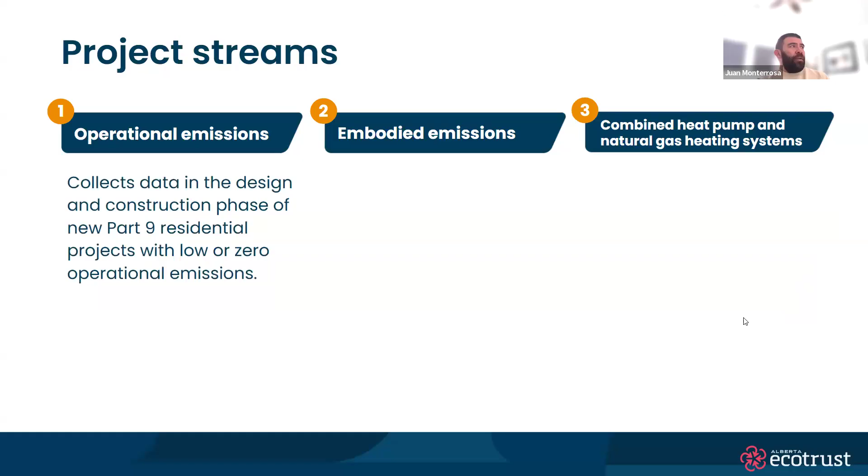This project was essentially, we took some inspiration from our friends in ZEBx in the Lower Mainland with their near zero research project, with their different streams as well. So we've been fortunate enough to learn from them and help build the program based off of their work. So there's three different streams that we are looking at. There is stream one, which is for operational emissions, where we're collecting data for new construction in Part 9 buildings, anything going with low to zero operational emissions.

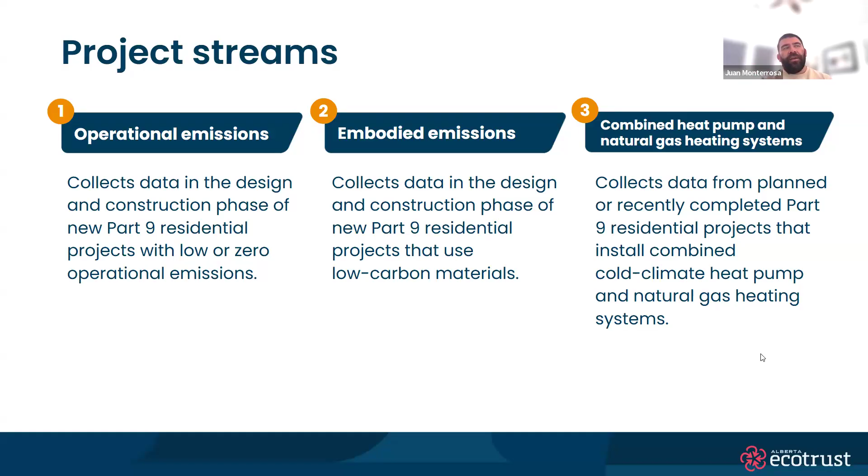The second stream, which is going to align a little bit with the work we're going to be hearing about today, is embodied emissions. So collecting data, same thing in terms of the design and construction for Part 9 residential projects for low carbon materials. And the third stream is looking at combined heat pump and natural gas heating systems. And again, getting data, and the biggest part through all these is finding costing data for each of those, but also trying to understand really the lessons learned throughout the process.

So this is a bit about where we're trying to get to and look at the current practices, trying to find the spectrum, I guess, of buildings. If you're just meeting tier one, tier two right now, what does it take to get to that tier four and up? If you've already been doing tier four and up for a while, what does that look like as well? And I think those different stories are very important.

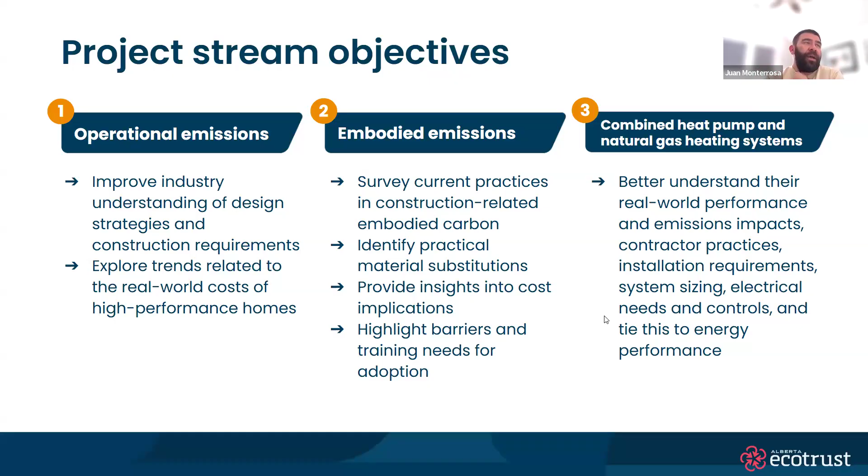The other portion of it, for embodied carbon and emissions, there's been a lot of great work done by Builders for Climate Action, and the reporting that's done through NRCan, that we could see what's happening across the country. And from our end, we want to see a snapshot right now in Alberta as well. And combined heat and natural gas, looking at again that Alberta lens that we talk about through our NBIX work.

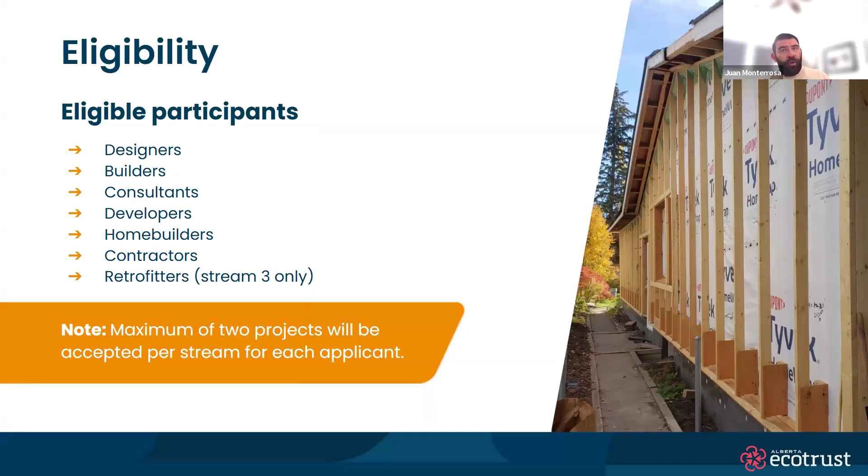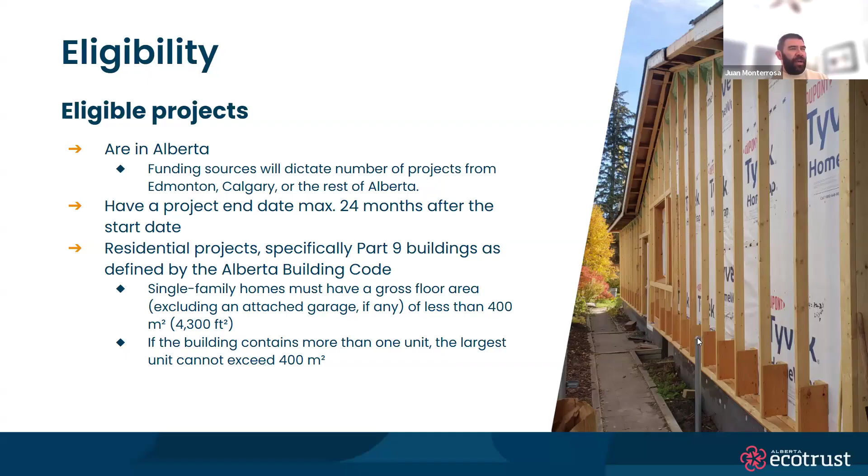But the primary things for eligibility is we're looking for designers, builders, consultants, developers. So it's not for homeowners. This is really looking at industry to help us provide some of that information. So the eligible projects. Projects, all the projects have to be in Alberta. The project end date is a maximum of 24 months after the start date, and they are Part 9 buildings, so single family, but also some multifamily that fall into that as well. We're not looking at commercial projects for either of the streams.

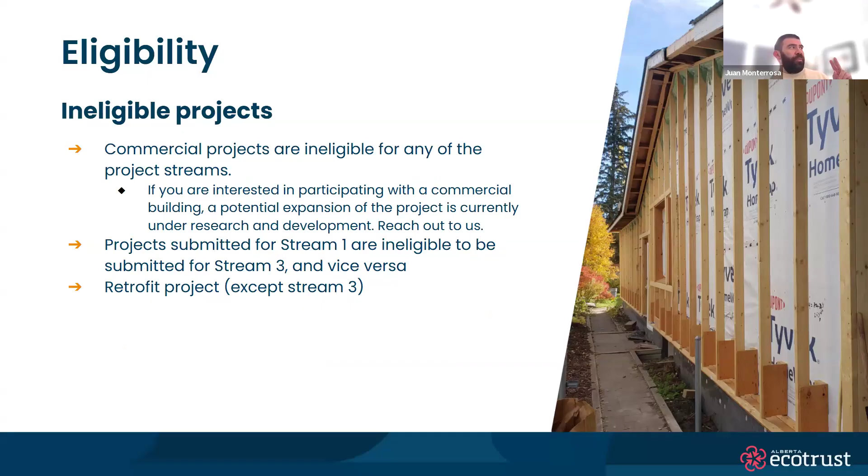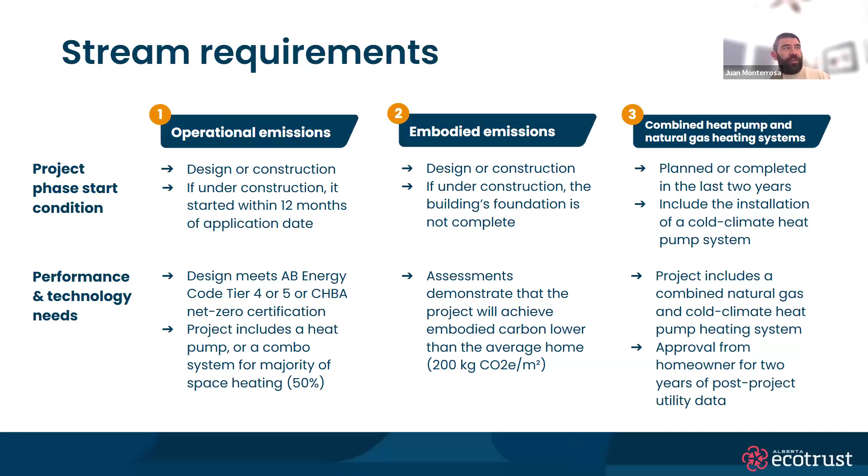If you're in stream 1, you're ineligible for stream 3, but there is an opportunity to look at stream 1 and stream 2 together. So the requirements, I'll put these up here. It is essentially questionnaires for design and construction, getting the information both on the embodied carbon calculations, the operational carbon calculations, and also on stream 3, the sizing of the heat pumps, but also the pre and post energy modeling for that as well.

The payments for all of the data, so for each one of the streams, this is how we're trying to entice applicants to come in and give us the very detailed drawings, energy models, and costing. So up to 25,000 available for stream 1. So again, there's 15 there for if you're at tier 4. If you're at tier 5 through the code, 20,000 and additional $5,000 if you're going with a ground source heat pump. With embodied emissions and the embodied carbon is up to $10,000.

So all projects will get 6,000 from the onset. And a portion of that is ensuring that those teams that have applied for this have also taken either the BEAM or the MC squared training, and then additional $4,000 if they're able to be 20% less than the 200 kilograms of CO2 equivalent per meter squared. And then there's the up to $8,000 for the stream 3.

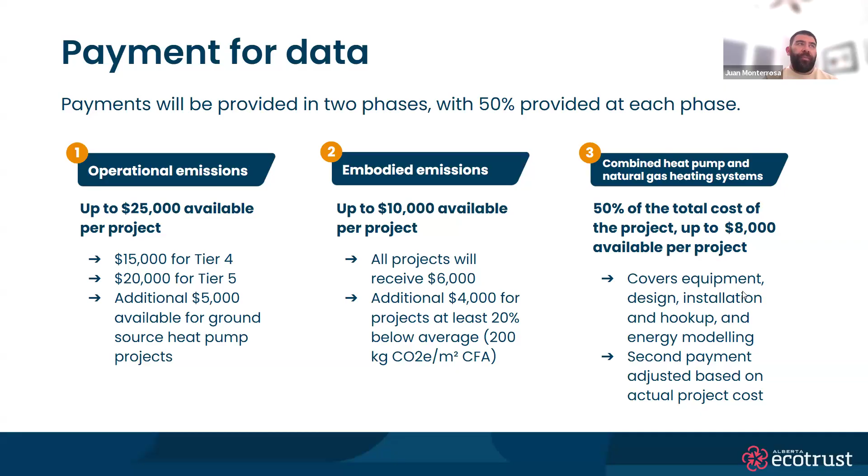So I think I've gone a little bit further, more detail than I had planned for here already. So I'll let Frank take over.

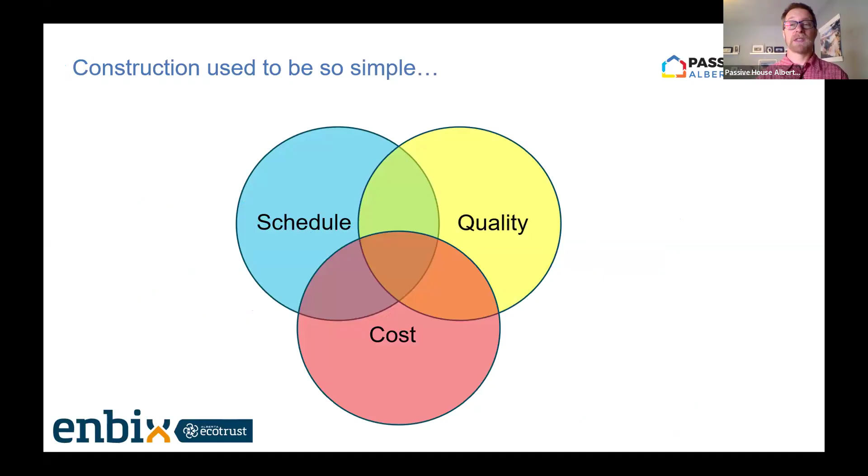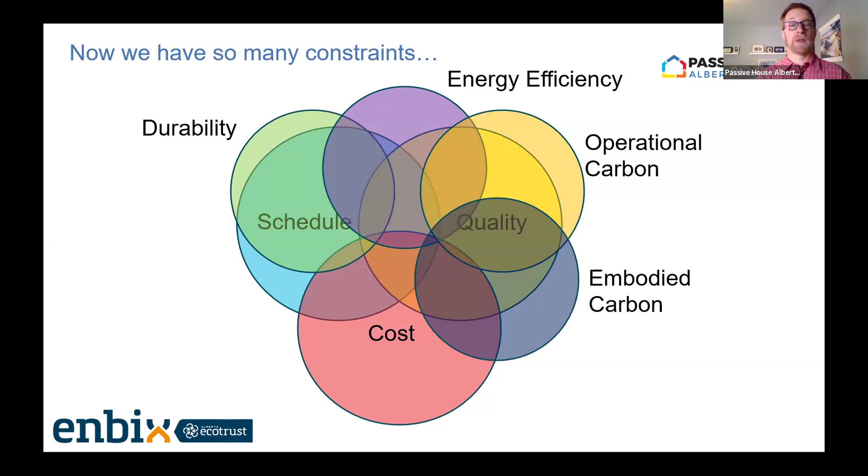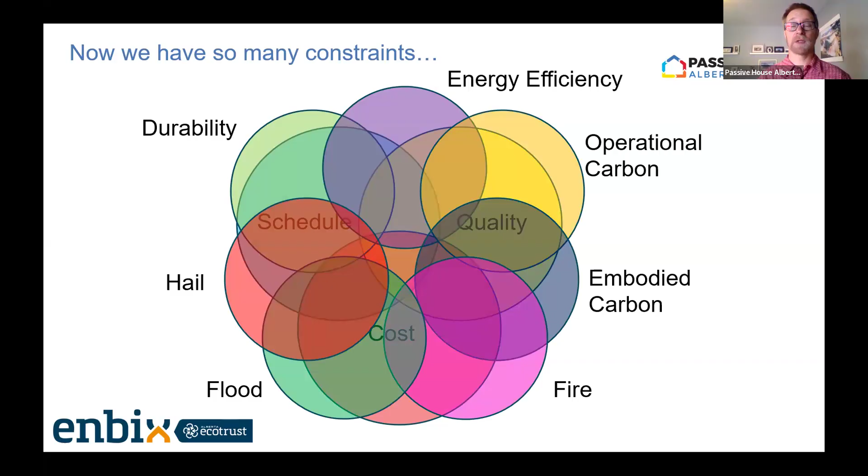But now we have to look at more things. So we are starting to look at how do we include durability, which is kind of those higher tier energy codes, how we improve energy efficiency, which is also those codes help us with operational carbon, embodied carbon, and then fire, flood, and hail. So those are some of those environmental risks that are definitely becoming more prevalent. Even if you're not sure if they're coming, your insurance companies know they're coming, and they are starting to change your costs of insurance depending how you react to some of those constraints. So lots more constraints we have to deal with.

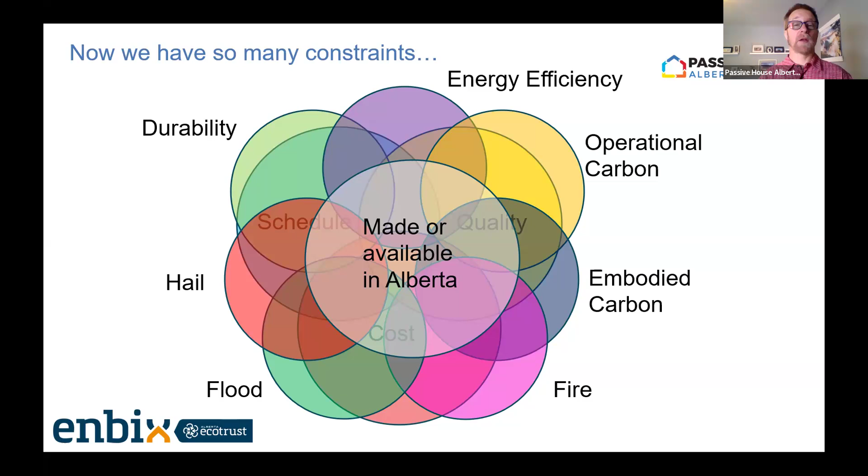And then finally, we want to make sure that all this stuff is available in Alberta, because if it isn't, then it's really not that helpful to us. And then kind of the overall goals, we're applying all of these good design processes and overlapping constraints, and we want to actually end up with a building that is comfortable. So what did the grant do? The grant was to look at some low embodied carbon materials. So what did we use?

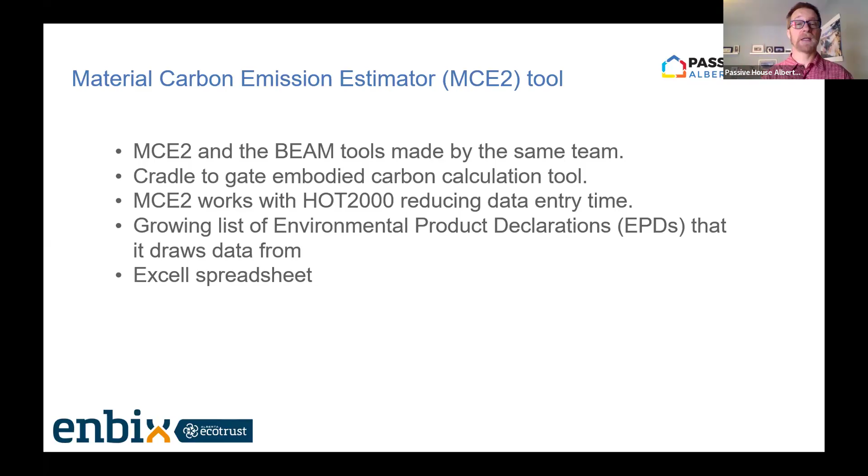There is that BEAM tool that Juan mentioned. We actually ended up using the MCE2 tool, which is the tool that works right off of HOT2000. So if you have a HOT2000 energy model, basically all the data gets directly imported to that MCE2 tool and just makes the data entry simpler. Both of them are cradle to gate embodied carbon calculation tools, and they all build off of that growing list of environmental product declarations. And really, both of them are just a big Excel spreadsheet. So they're really not that difficult to use. A few hours of training, a few hours of playing around with it, you will be able to pick it up and get some usable, informative results out of it.

So for those fire, flood, and hail, we use the Institute for Catastrophic Loss Reduction, nice big long acronym. They have a new resiliency tool, and that resiliency tool is designed to assist designers in selecting some assemblies and help them make better choices versus poorer choices. So they came up with a good, better, best rating for various options within various different potential risks. And the risks that they looked at were extreme heat, smoke and fire, floods, hail, and high winds, water shortages and droughts, and slope stability. So depending on where and what your project is, you might have all of them or a few of these risks that might occur.

And then you can go and look at that good, better, best rating system to see what products, materials, processes they recommend that you use.

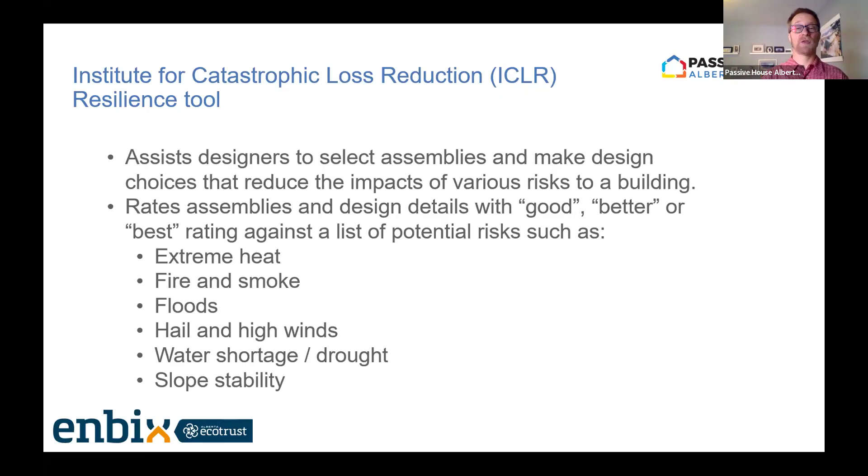Okay. So once we start talking about these low embodied carbon materials, let's start with the big elephant in the room, and also the easiest one to change, which is low carbon concrete. So concrete produces about 8% of the global carbon dioxide emissions in the world. So it's a pretty big chunk of the pie.

And because of that, over the past few years, concrete producers have responded with a number of what they call low carbon mixes. And really what they're doing is using supplementary cementitious materials to replace the cement, because it's actually the cement in the concrete that has the highest carbon emissions equivalents.

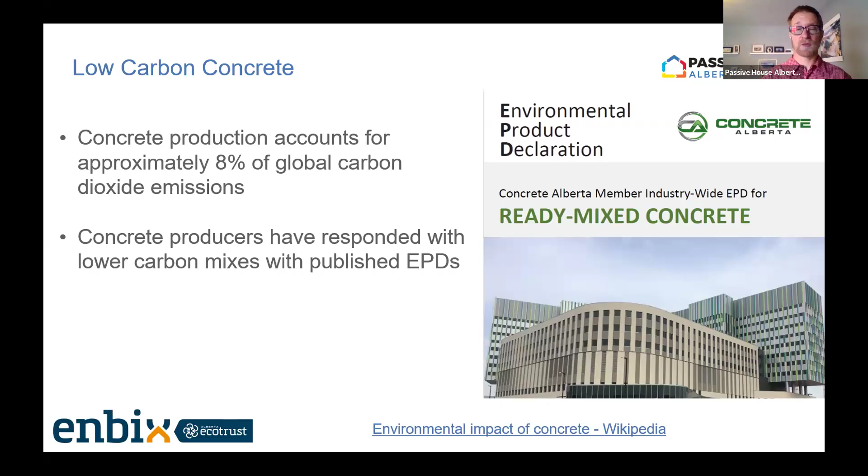There are breakdowns by province. So this is just a screenshot of the Alberta Ready Mix Concrete Association. So you should be able to call up your local ready mix supplier. This is the one from Lafarge. So Inland, Heidelberg should have the same one. Burnco, some of the smaller ones, should also still have availabilities.

And here you can see that just by looking at two different EPDs that have the same strength, so all the same performance criteria, they have a 10% carbon reduction. And because concrete is a fairly cost competitive industry, these lower carbon concrete mixes don't cost much more. They're probably very equivalent cost.

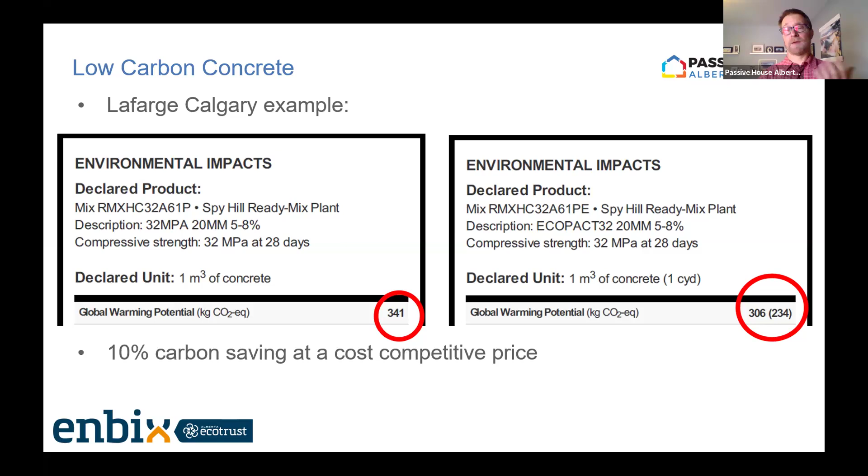In Alberta, the easiest one is just to swap out your cement for high fly ash. We've been doing this in Alberta for a number of years because we have good fly ash availability. So if you do nothing else from this presentation, please, next time you buy concrete, ask for the low carbon mix. That will get you the first step in reducing your carbon on a building.

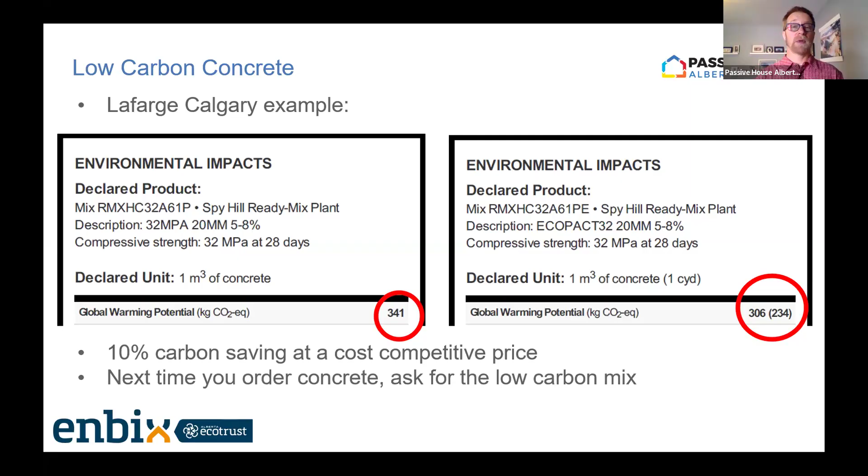So now let's look at some other options. So what we did is we basically took a whole bunch of common assemblies and broke them down by where the assembly is, and we gave them the nominal R value. We gave them an embodied carbon number, and then we roughly rated them with cost, fire resistance, durability, flood resistance, hail resistance, and those three colors just represent the good, better, best, or lowest, medium, high costs.

So starting at the very bottom with the slabs, there aren't a lot of options for our slabs. The current standard is just a 4-inch concrete slab, no insulation, which isn't a very good idea from a thermodynamics point of view. So ideally we add at least 4 inches, possibly 8 inches of EPS, so you can see the R values go up. And then we also included SI Construction.

They have a Polycore R slab, and it is a concrete-free slab. It still gives you some of the structure, but most of the structure is on the walls. It gives you enough structure on the floor, but it doesn't use any concrete. So as you can see, the embodied carbon number of the SI Construction Polycore R floor is actually less than just the 4-inch concrete.

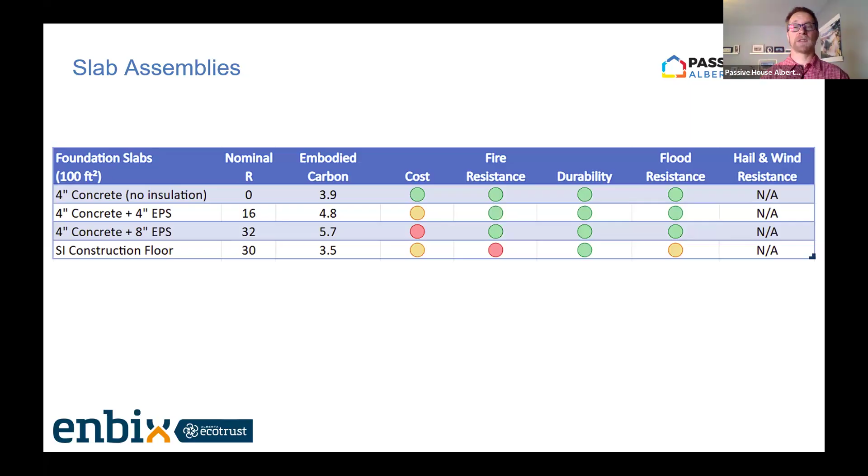Fire resistance, obviously 4 inches of concrete gives you better fire resistance than the Polycore floor. Durability, they're all fairly good. They're all fairly good for flood resistance, and hail and wind resistance really isn't an issue with slabs.

So let's move up a little bit more. Let's talk about some foundation assemblies. And now there is a much larger list, and this isn't a full list. This is just a list we have done so far. So if you're interested, if you're a supplier or you have your own assembly that you like, by all means, reach out to us at Passive House Alberta, and we will add your assemblies to these lists, and they will eventually get posted onto ENBIX or other websites.

So with these foundation assemblies, there's a lot more options. Again, we can start with just your basic concrete foundation wall with interior insulation, either 2x4 or 2x6. Then we can go to an insulated concrete form with various thicknesses of concrete cores. Then SI Construction also has their no concrete foundation wall, which is called the Polycore wall, in various thicknesses.

SI Construction is a local Alberta company in the Edmonton area. And then there's also ZS2 Technology. They make their tech panel, which is two magnesium oxide boards with a spline of wood. And we did those options. And then we also did the pressure treated wood foundation options.

So here you can see we did various different nominal R values. The embodied carbon numbers can vary significantly. The pressure treated woods, because they're wood, no concrete and no steel, are generally the lowest numbers. But the SI Construction and ZS2 ones aren't that much higher.

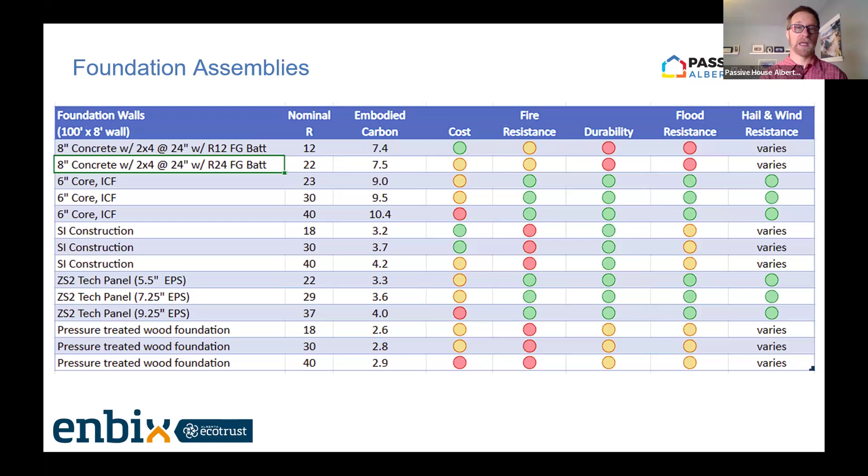Costs do vary a fair amount. Fire resistance, durability, flood resistance also varies a fair amount. So in this, it is a little bit difficult to find one that does everything perfectly, but depending on your priorities, you can find that one does the most things as best as possible. So now let's look a little bit more in detail on two of those assemblies.

First, we'll talk about the SI construction polycore slab and wall. So essentially, it is an EPS foam with embedded steel studs. So the steel stud is all the structure. On the floor, they add a layer of tongue and groove plywood to give the structure to hold it together. On the walls, there is no sheathing needed. The structural steel has all of the structure.

And then this is part of our screenshots from the printout from that MCE squared tool. And it kind of shows you the main areas or the 7 most carbon intensive materials. Below that, we showed what we actually did as a wall assembly. So we made a kind of standard wall assembly. We made it 100 feet long just to get some numbers that were large enough. And then you see below it the actual carbon number. So it's 3.5 net carbon footprint.

Some materials have either short or long-term storage. The SI polycore system doesn't, because that long-term storage is generally organic wood materials. So both of these, or the foundation wall, could be used above grade, but we believe that there's some lower carbon options for above grade. But this is a very good low carbon below grade option.

Another one is the ZS2 Tech panels. Again, here you can see the drawing. So they have their proprietary MgO magnesium oxide board. And the really nice thing is that magnesium oxide board actually has an environmental product declaration for it. And I believe they are the first MgO manufacturer in the world with an environmental product declaration. So cheers for them for getting that.

And then the next one down is the Savick prefab straw panel. So Savick is a small prefabrication shop. They are located again just outside of Edmonton. They're using basically a double stud assembly, but they are collecting the waste straw from their farmers' fields. And straw is not hay. Hay is nutrients and animals eat it.

Straw is the non-nutritional, basically inert stalk below wheat and barley. So we grow it for the wheat and barley, but that straw stalk below is essentially waste. A little bit gets used for animal bedding, but most of it is basically a waste product. Some of it does also get returned to the land as fertilizer, but there is metric tons of straw surplus. So that's why it's a good circular product, and it also has, based on the EPDs, even higher carbon storage.

Because you can see here, there are the positive, and at the bottom, there's that straw bale, which has a fairly large carbon storage, and there's also some wood fiber board on this one. So this is one of the most carbon storing assemblies that we found.

Let's move up a little higher now, and let's talk about roof assemblies. So again, there's not a lot of roof assemblies. Basically, the 3 that we found that we've tested, and if we've missed any, by all means, reach out to us. So there's a loose fill fiberglass in a vented attic. This is kind of your common lowest cost assembly. Then we go to loose fill, but instead of fiberglass, we have cellulose blown into the vented attic.

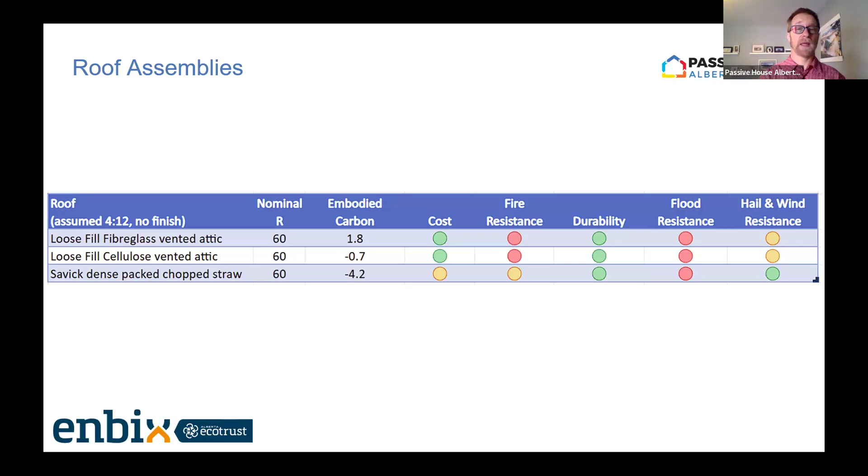None of them are really flood resistant, but to be honest, if the flood reaches the roof level, your house is probably a write-off anyways. And the straw, just because it's dense packed in there, has a little more inherent wind and hail resistance than cellulose and fiberglass. But again, for that wind and hail resistance, we really should be relying on that roof membrane. And these are all the same nominal R value of R60, and then there's shown the embodied carbon numbers. So let's again look in a little more detail.

This is the vented attic truss with loose blown cellulose. So this should be kind of the default. This is one of the lowest cost because cellulose is a very low cost insulator. Some tricks when we are doing this type of vented attic is we want to make sure that we are having what's called a high heel energy truss. So that just means that the very edges, the perimeters of the roof trusses don't come and touch the wall below. We can maintain that same thickness of cellulose throughout the whole depth and the whole width of the roof.

We still need to make sure we're having good ventilation. So we might need to extend those ventilation baffles so that they are above the cellulose depth. And we're bringing ventilation in from the soffit, past the insulation, then out through the attic. Other than that, it's pretty typical what you should be using most commonly.

Again, there are some carbon positive materials, but we throw in that loose blown cellulose and we get a fairly good carbon negative number. And again, there is still that short and long-term potential from the wood framing.

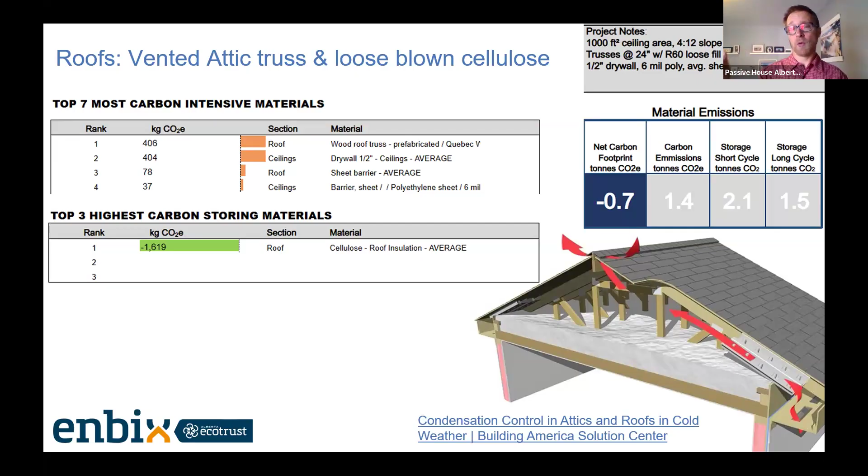Okay, now let's move up even further, all the way up to those roof materials. So we did look at what type of roofing materials we wanted to use, especially as we're starting to bring in those other resiliency metrics or considerations, because that's really where it does make a difference. So cheap asphalt shingles are cheap. They're still fairly low embodied carbon at 0.9 tons. They are the lowest cost.

And unfortunately, if you buy the lowest cost shingles, you're going to get the lowest fire resistance or no fire resistance. The first hailstorm is going to destroy that roof, and no flood and no wind resistance. So in some places, your insurance is going to start requiring you to use higher quality, higher durability, higher performance shingles. They can have higher class ratings for both wind and fire resistance. And once you start using those higher rated shingles, obviously the price goes up.

So then we compared it to what we see as the better option for our roofs. That would be a metal roof. So it is a big jump in embodied carbon from 0.9 to 2.1. Cost goes up a little bit, depends on your local jurisdiction, but the fire resistance goes up, durability goes up. Most metal roofs are warranted for 40 to 50 years, and the wind and hail resistance also goes up. You might get some dimpling in a metal roof, but other than that, the hail will not go through it.

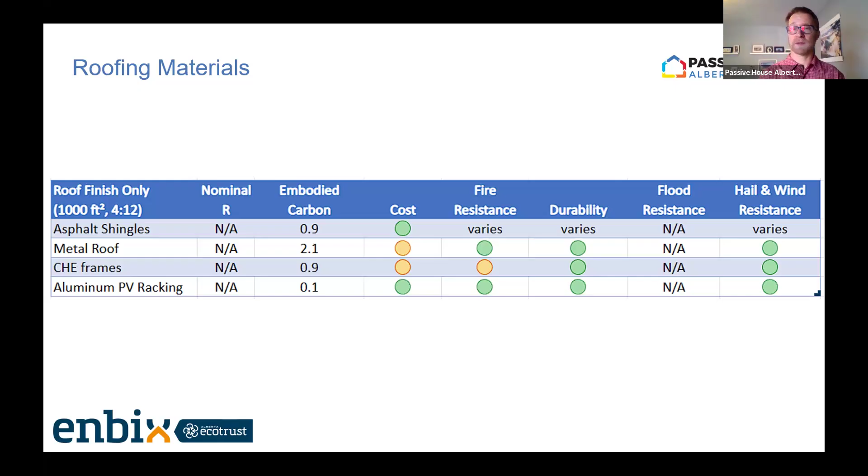So the other one we looked at, which is the newer one, which you might not have heard about, are called CHE frames. These are being imported from Europe. They've been around in Europe for a number of years, and they are basically a plastic and steel frame that you then mount your solar panels directly on. We didn't have an EPD for it, so we had to use materials, and we did come up with an embodied carbon number, and it's closer to those shingles numbers. So it looks a little more detailed, that CHE frames.

So they are an example of a building integrated photovoltaic system. It consists of plastic and some stainless steel and a few other materials. So we had the masses of those materials, and we were able to enter them into the embodied carbon calculator to come up with that number.

And basically, the advantage of them is they replace the actual roofing material below it. So as you can see here, below those CHE frames, you don't have shingles, you don't have metal deck. You still have the waterproofing and a ventilation space, but you don't have the materials below it. And then the solar panels just get mounted directly to it. They're still set off enough so you still have ventilation underneath it.

Ideally, where we see this used the best is on a cathedral ceiling, where you would have a larger 2x4 ventilation cavity above that cathedral ceiling or prefabricated envelope. So you have that 2x4 depth of ventilation, and you can see that the frames are open, so you get lots of good cooling below the solar panels. And then it sits very flush with the roof membrane around it, so you don't need the metal critter guard, and it just has a much flusher, cleaner look to it.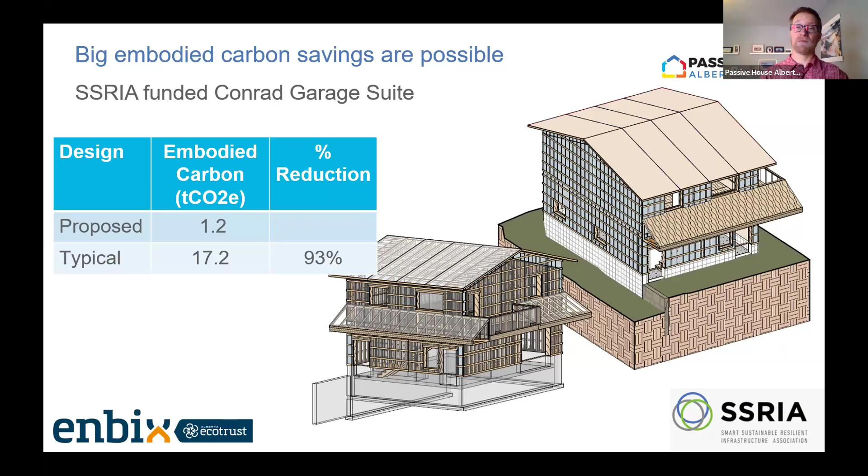And we did both a code minimum embodied carbon calculation and the proposed or as-built one. And as you can see, we went from about 17.2 tons down to 1.2 tons. So that's a 93% reduction in embodied carbon that is possible and achievable in this project. So what did we use? Well, first of all, this is the project-specific material carbon emissions. It shows you where the big negatives and the big positives are. Again, this is another output from that MCE squared software.

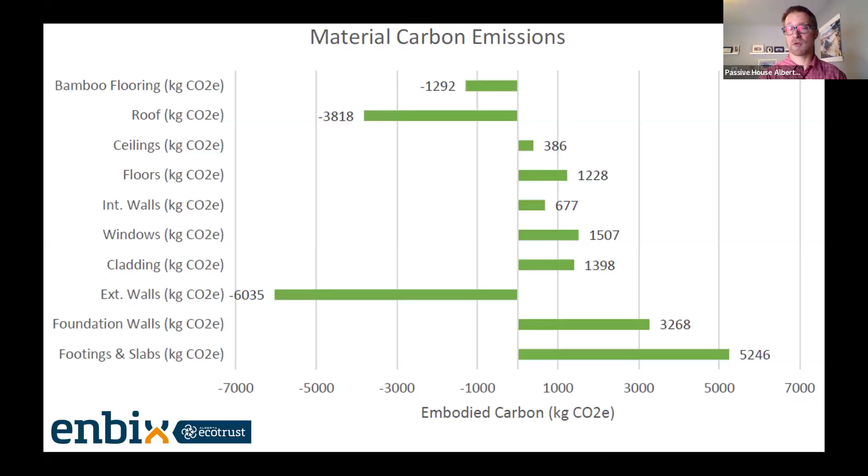The building still needed a small strip footing. And even though that strip footing was fairly small, it still ended up being the biggest carbon addition. This is standard concrete. We were able to order the low carbon concrete on site, so in the final reports from this project we will show you the actual as-built, and hopefully that footings and slabs number will get even smaller. Then there are a few other various numbers, none of them big. The big numbers are generally the concrete, and the big negatives come from using either straw or cellulose.

Okay, so now let's talk about budget, because no one's likely to use low embodied carbon materials unless they are cost competitive, and that's really what we were looking for in this research project, that we could find those cost competitive products. For the Conrad Garage Suite, the budget was about $450,000. But this is essentially a 1,500 square foot two story home, because the main floor, even though it's a garage, can also be designed as a workshop, since the insulation values on the main floor are the same as the suite above, and the main floor could be turned into a suite in the future.

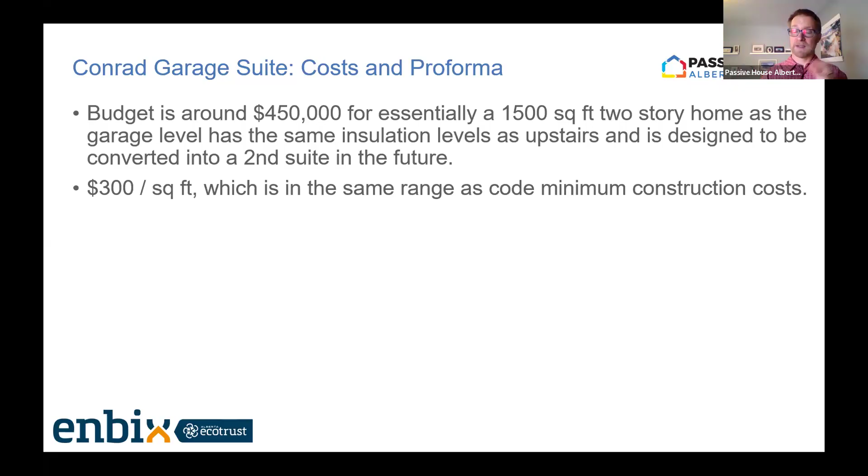So what does that work out to? It nicely works out to $300 per square foot, which we believe is in the same range as what code minimum buildings are being built to. Obviously, that range is larger, maybe 280 to 340, or I've even been hearing $400 and $450 per square foot recently. So we think it's in the same range, but included in that number is about $21,000 to upsize the water main, which is a requirement if your water main is less than 3/4 of an inch. When you add a suite, the demand from the additional people makes you go up to 1 inch, and that's about $21,000 to do in Calgary.

And obviously, if we're looking at cost effectiveness of additional dwelling units, it's all about the income and the expenses. So the first occupant of this garage suite is going to be the owner's mother-in-law, and they're currently paying about $2,500 for an assisted living room. Not full needs, but still some assisted living.

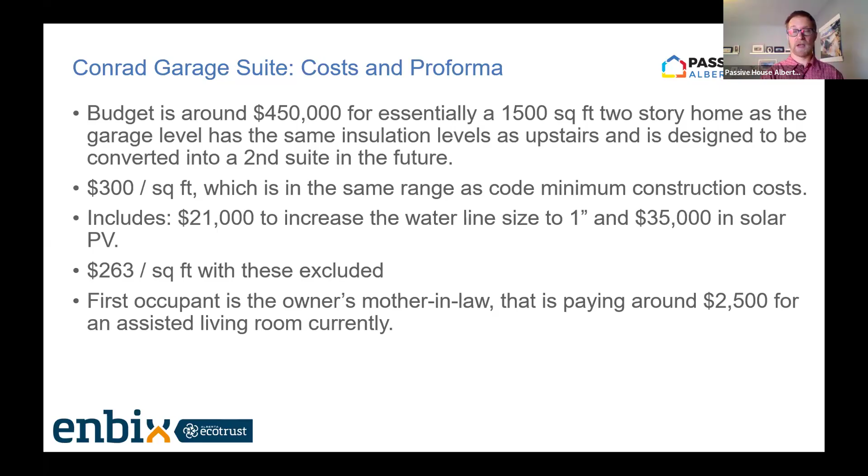So the cost effectiveness of this building will be reviewed as part of the final report. And really, it's going to come down to what type of rent you would be able to rent it out for, on how fast this can be cost effective. But we do think that these low carbon materials are cost effective options.

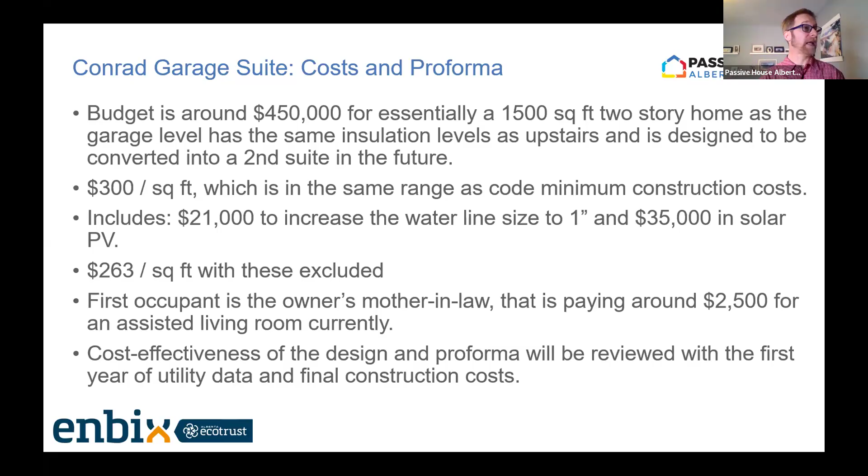Now let's look at another example. So this is from a larger rural estate home. This is the actual pricing from it. So again, it was a high performance home, had some high performance goals, but no specific embodied carbon goals, but we still looked at different types of assemblies. So starting at the bottom, that slab on grade. The basic was 4 inches of concrete and 8 inches of XPS foam below it. And then the alternate was using that SI Construction Polycore R slab option.

As you can see here, the cost for the R slab was actually less, about $5,000 less. And it was also not as thick because really all of the insulation is used. You don't have that concrete thickness plus the insulation thickness. So we saved a bit of excavation. The R value was a little bit lower because the steel studs at the top of the SI Construction do reduce the effective R value.

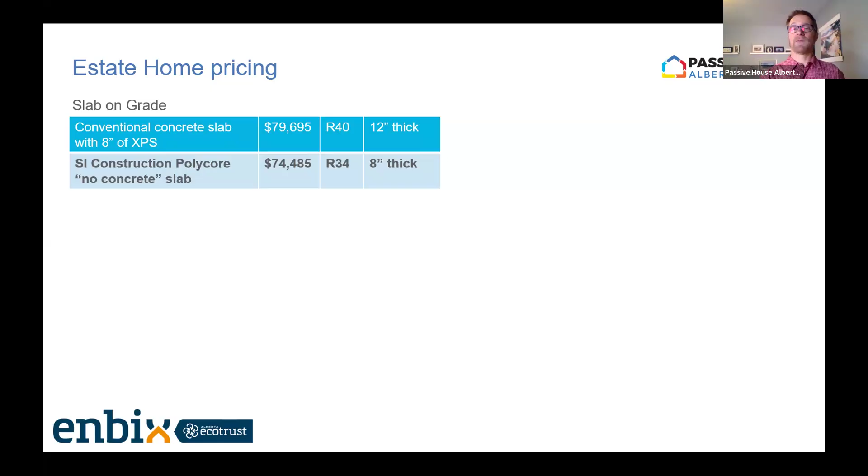But then we went back to the energy model to see if the change from R40 to R34 made any impact on the overall energy performance, and it was very minor. So we decided to stay with the floor at R34. We could have added more foam, but we didn't see any need for doing that from the energy model. So in this case, our lower carbon, roughly equally performing option was lower cost.

Now let's move up to the foundation walls. So we looked at 3 different options. We had an 8-inch concrete wall with 8 inches of EPS foam. All 3 of these walls are R40. Or we had a 13-inch ICF with an additional 4 inches of EPS, because most standard ICF walls are only about R25, and we needed R40. And then again, we looked at that SI Construction Polycore wall. It only needed 12 inches to get to R40.

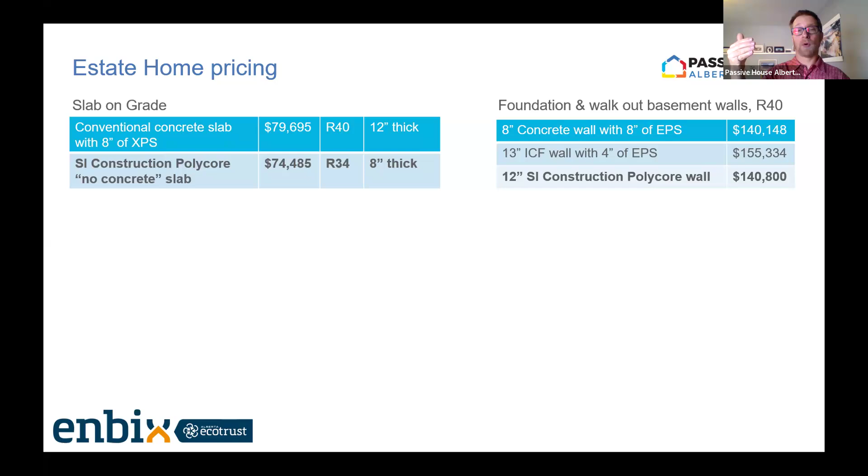And again, it was right in the prices. It was slightly more than just the concrete wall, but because we're using the slab as SI Construction, it made sense to also use it for the foundations, and it allowed us to install quicker because there wasn't the concrete pour, and getting concrete to this somewhat more remote location was always a bit of a logistics challenge.

Now let's move again 1 level up to our above grade walls. We used that SI Construction Polycore wall, and we used the Savic prefab dense pack straw walls. And we also had a double stud fiberglass wall. So the double stud fiberglass wall was the cheapest, and it was about 13 inches thick. The interesting thing is, for those Savic walls, because it's using straw, which is a waste product, we actually got a quote for both an R40 wall

and an R60 wall. And because that straw is essentially a waste product, the cost from going from R40 to R60 was really only about an additional $8,000 or $9,000. So if we just compared R40 to R40, the Savic wall would be very close to that double stud fiberglass wall, but we got a 50% higher performing wall for just about $9,000 more, bringing it up to $64,000. And 16 inches thick, but we're on a rural acreage. We had acres, wall thickness didn't make any difference.

So in this case, the owners decided to spend a little bit more, about $9,000, to get 50% better above grade walls. Pretty good return on investment, I believe, there.

Now let's go all the way up to the roof. So here for the high performance, we wanted R90 equivalent. So we looked at the Savic prefabricated cathedral ceiling panels and just our standard vented attic with loose blown cellulose. And here the cellulose was again about $9,000 less. And because they're both the same R values, we decided to stay with that lower cost option of just the vented attic instead of going with the cathedral ceiling.

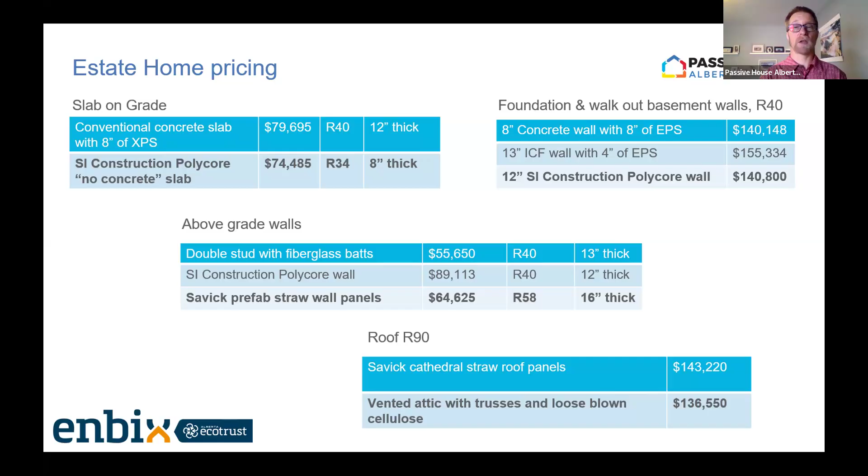But again, both of these are low carbon options. The straw was slightly more, but the cellulose was still very carbon negative. And this time they took the cost savings on it. So kind of to wrap up, hopefully some of these low carbon, low cost assemblies are of interest to you and you start looking at using them sometime in the future or your next projects.

But when we start to think about carbon, one of the biggest things we need to always remember is step one is just use less stuff. Building nothing, building less, building clever, retrofitting, renovating, not building new. Building new should be kind of our last option. And then when we do that, then we want to make sure we are using the low carbon materials on it.

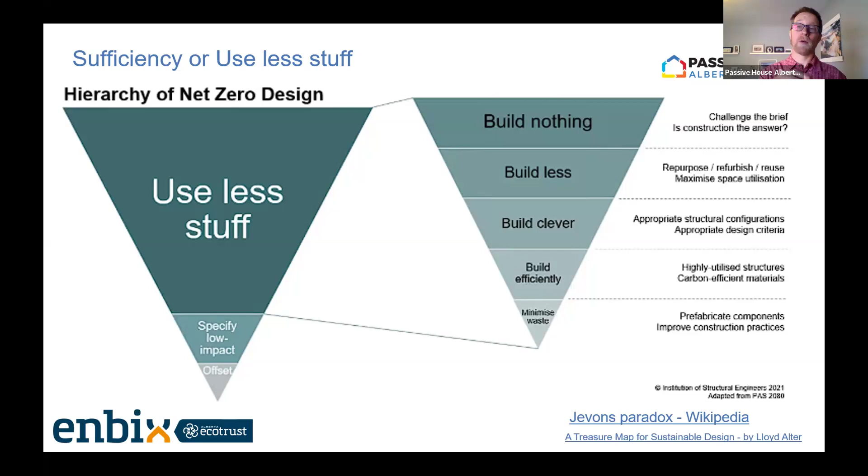If we don't do this, then what we're going to likely fall into is what is called Jevons paradox, which is where as the cost of something gets less, we actually end up using more of it because it's cheaper. So as we get more energy efficient or improve the performance of something, we end up just using more of it instead of less because it costs us less.

So final comment on sufficiency, housing, and use less stuff. This is a graph of the size of single family homes in Canada and the US over time. There's only 2 dots from Canada, but it shows that from 1970 to basically 2010, the average size of our single family homes has doubled from 1,000 to 2,000 square feet. And in the US, it's gone even higher. So Jevons paradox could be an example of this. As costs go down, we just end up using more.

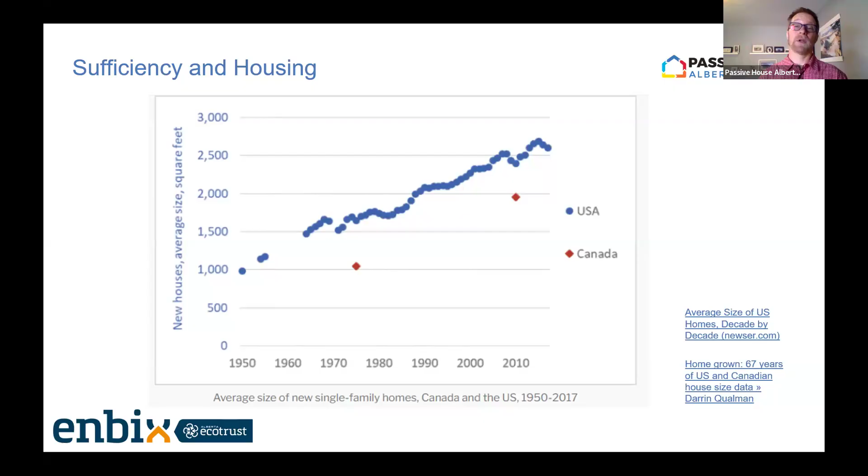But if we don't start to change this trend, low carbon, low cost, energy efficiency, none of that is going to allow us to solve the problems of just overconsumption that lead to climate change and some of the other various crises that we are currently facing. So with that, I'll end it.

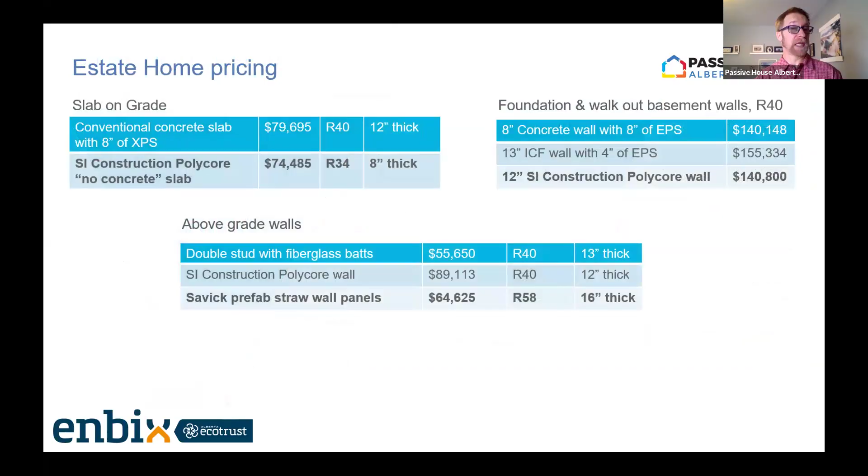Does anyone have any other assemblies that they think we should look at? Or do we want to talk more about maybe some of the different fire-related or costs on these?

Has anyone ever used the BEAM tool or the MCE² tool, or is this all new to most of the people?

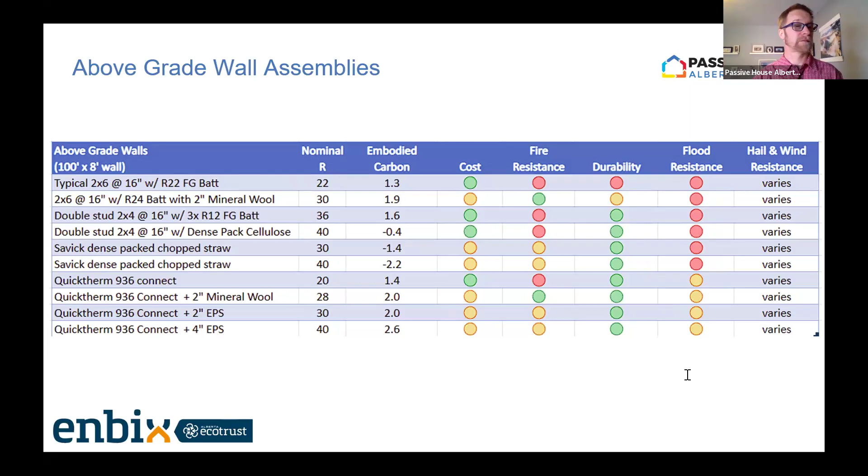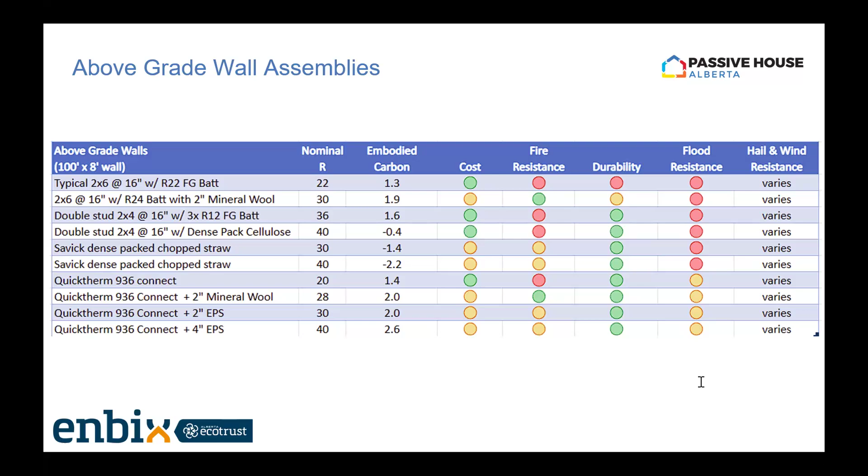I had one question based on the tools. When you go deep into it, there are the biogenic numbers that you can use in some cases. So let's say for the Savick products, are you taking that into account in terms of the EPD that would be used, like that first negative number that you would get, when you're building your scope for those calculations? In that first EPD, do they take that biogenic number as part of it?

So for straw and cellulose, they take the biogenic because it is a recycled product or a waste product. That's where the net comes in. The long-term and short-term storage that is shown in these tools is basically the wood: the 2x4s, the plywood, the OSB. The reason that they don't include it by default is because we don't know where those 2x4s came from. We don't know if the forest that they're harvested from is sustainably managed.

With FSC certified plywood and 2x4s, you could probably make a better argument that you can include some of that wood. But if we don't know where the 2x4 came from, then best practice is basically to just have it zero. It's not carbon positive, but it's also not carbon negative, because we are taking that carbon from the tree. If we left the tree there, it would continue to grow and sequester more carbon. So unless we are sustainably removing the trees and keeping the forest healthy, we don't want to pull the carbon somewhere else and then take advantage of it later.

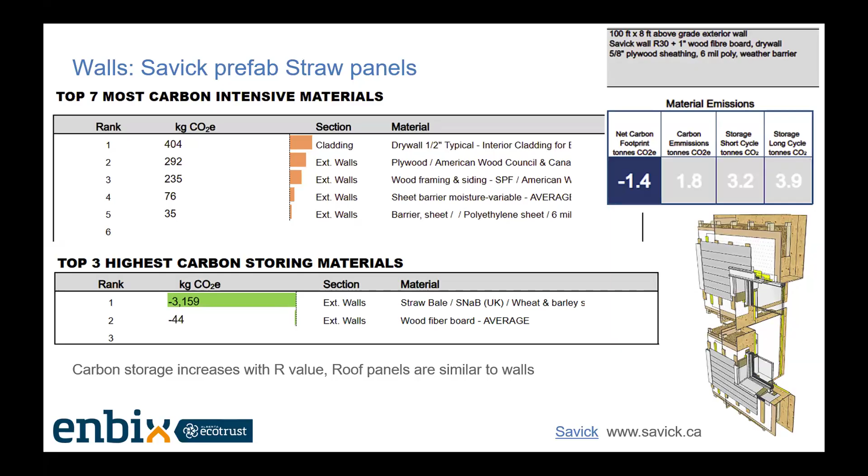Frank, I was just going to ask about the concrete-less slab and a couple questions. First of all, how many people were hesitant in going that direction? How is it standing up to vehicle use? And in your opinion, would it be better to use the SI system or the system that you did use for the garage for the concrete-less?

For the SI construction, both of the projects, the Conrad Suite and the estate home, use the SI slab floor. It won't feel as hard as concrete because it isn't concrete, and they generally recommend that you put it on a full bed of sand so that you have full bearing on the foam. Otherwise, the worst that can happen is it feels a little bit bouncy or squishy, but that's not often a problem.

The other nice thing is because there is no concrete, if you have any problems with the floor, you just unscrew the plywood and lift the floors up, because it's basically 4x8 panels. The plywood goes down, gets screwed to that embedded steel, and that's what gives you the rigidity. In the Conrad Suite, where we have 2 layers that a car drives on, we're not at occupancy yet, we're still mid-construction, but I've been on that floor and it feels almost as solid as a concrete floor to me.

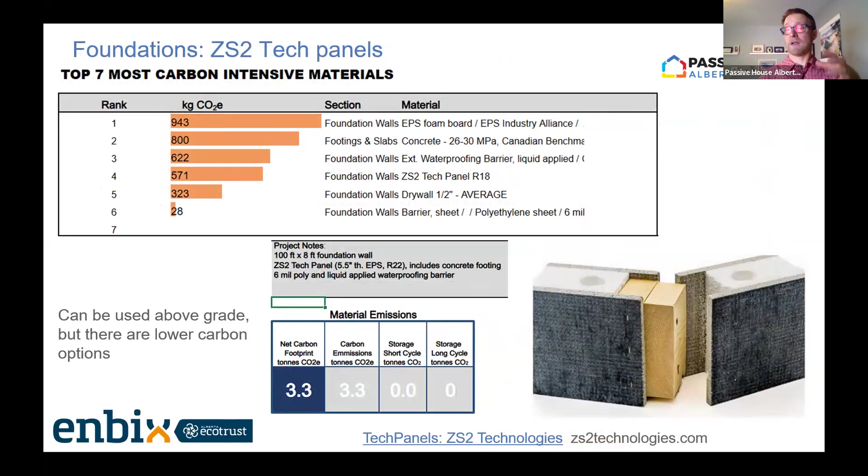We're actually kind of looking at, could we combine maybe the ZS2 MGO board, not the full SIP panel, but just the board, replace that with the plywood here to give us a little more rot and mold resistance on that floor. But we're pretty comfortable if we just put in some type of resilient flooring with the seams sealed like linoleum. It's pretty durable. Then the water should not get down to that plywood below, and it is pressure treated plywood.

Okay. Did you ever think about using pressure treated sleepers underneath the plywood? That kind of system with insulation? So kind of like a pressure treated slab as opposed to a pressure treated wall. Yeah. We looked at it, kind of basically the way this project was set up.

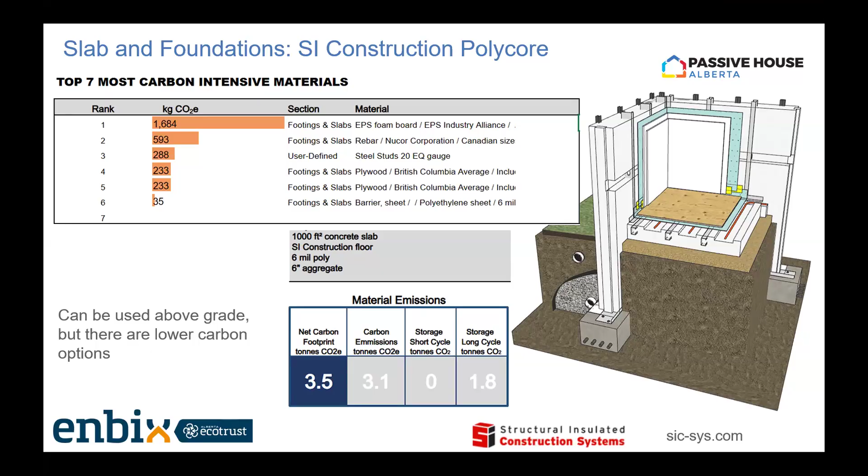It was a nice combination to have the SI construction walls and the SI construction floor as a system that's made in Alberta that we can kind of promote, that comes with all the engineering. There are lots of different options to do it. But yeah, that's kind of why we picked it for this one. Great. We like systems as opposed to having to think it up ourselves.

What is the best way for manufacturers to get their EPDs listed? So the EPDs actually would not be listed with Passive House. Any manufacturer could go and get an EPD. Unfortunately, they still cost kind of $50,000 to $100,000 to create them, which is obviously one of the constraints that we're still trying to work through.

But once you create that EPD, then there are a number of different software providers, the MCE Squared and the BEAM tool being kind of the 2 most prevalent for residential. Once you go into commercial, then it's kind of One Click LCA and Athena and 1 or 2 other ones. So once you basically have the EPD, then you just publish it to as many different software providers as possible.

And the coordination of those software providers is one of the areas that the overall embodied carbon realm is still figuring out, because unfortunately a lot of those software providers don't like sharing because that's where they make their money. So again, there's a little bit of gatekeeping on some of this information, but any manufacturer could just publish that EPD on their website. And then you could also just bring individual EPDs as user entered data into the software if it's not preloaded into the software.